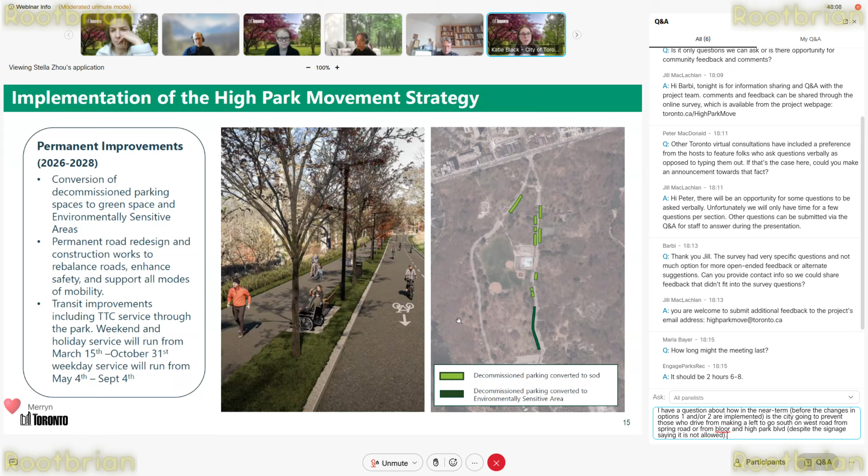Then there will be the report to council. Based on the implementation work and everything that's been done to date, and monitoring of those results, staff will report to council to provide direction on any recommended additional travel network changes and improvements, including the potential for full road closures at all times in High Park.

Next slide. So I'll go now to the project overview, which is specifically the work that we're focusing on today.

Next slide, please. The goals of the road redesign work are to implement the recommendations within the High Park movement strategy regarding specific roadways and pedestrian areas in the park. The overall goal of the movement strategy is to better serve park users and the surrounding community while prioritizing improvements to safety, accessibility, and the park's natural environment. You'll see through the presentation today that we've tried to highlight how the designs are working to achieve those goals, and we welcome feedback on whether or not you think those are working or not.

We've included questions in our online survey too, for folks to respond that way. The scope of the project is focused on Colborne Lodge Drive, West Road, and Centre Road. It will include intersection and road crossing safety improvements, sidewalk expansions, permanent buffered cycle lanes, the construction of a diverted cycle lane around the Grenadier Cafe, and considerations for ecologically sensitive areas, existing trees, and ongoing stewardship initiatives. I see a lot of turtle emojis in the chat, so maybe those are turtle protectors joining us today, but those are definitely being considered as part of this work.

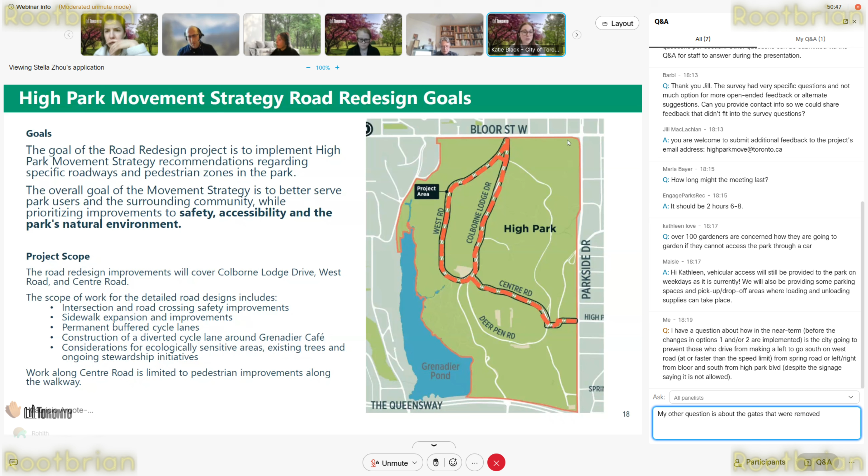In terms of where we're at in the project schedule, I'm sure many folks were involved in our fall initial phase of the work, where we had an online mapping survey for folks to provide their feedback. Our consultants were also gathering background information at that stage, getting up to speed on how the movement strategy has been implemented so far and how it's been working.

Now we are exploring design options, so we've prepared two options for folks to review and get feedback on. We're also getting feedback from a number of other technical partners, such as the TTC, and different city partners or divisions, such as transportation services or natural resource protection, and other groups like that, on those design options.

In the summer, once we've heard all of that feedback, both from the public and our technical partners, we'll use all of that to develop a preferred design. That direction will be communicated in summer 2026. Once we've brought that to the public and heard feedback on that final preferred direction, we will then begin our detailed design and contract documentation, putting it all into construction documents. The aim is to tender the works in spring 2027 for a summer 2027 construction start.

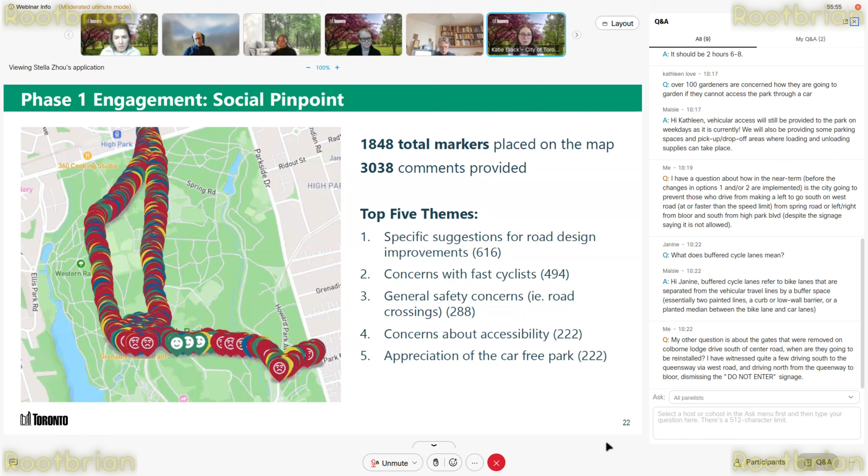So we chose the areas you are seeing in the online survey, and that we'll be talking about today, based on these areas where we've received the most comments, because this is where people have the most input and the most concerns about safety and movement through these spaces. Next slide, please.

Okay Lindsay, can I take it over to you to do the poll? Absolutely. Thank you, Katie. That was great.

So as you've heard from Katie, the scope of this project is very specifically about rebalancing the roads for a variety of users. So we just want another brief opportunity for you to feed in some information to us and for us to know who else is here. How do you like moving through the park? You can pick many, because I think many of us move through the park in many different ways.

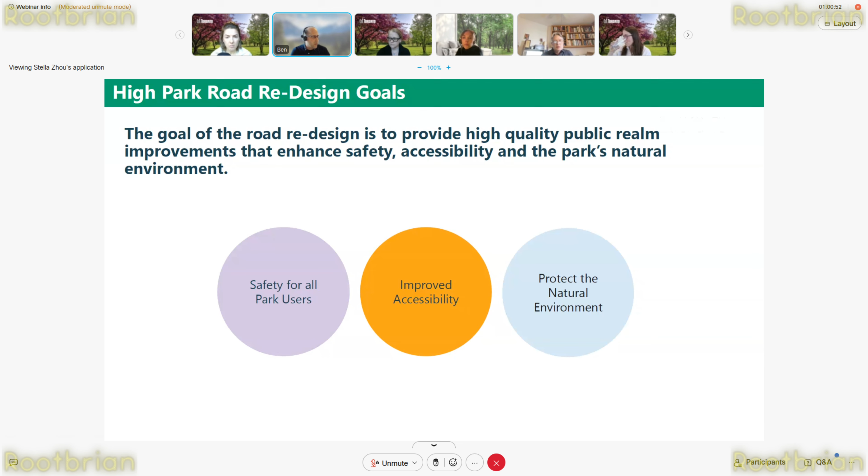Let's move on to the next slide. So we do have the two design options, but here in our approach to enhancing safety, I want to go over how both options enhance safety. There's a number of shared features between the two options. I don't know how many people have taken a closer look through the survey, but some of the common themes are listed here, and I'll go through them and how we think they meet that goal.

One of the key items is crosswalks within the design options are proposed to be raised to give that feeling for pedestrians as they're moving across the road in various locations. Not necessarily the priority, but a location where it's visually clear that they are meant to be crossing, with that clear indication of that crossing level.

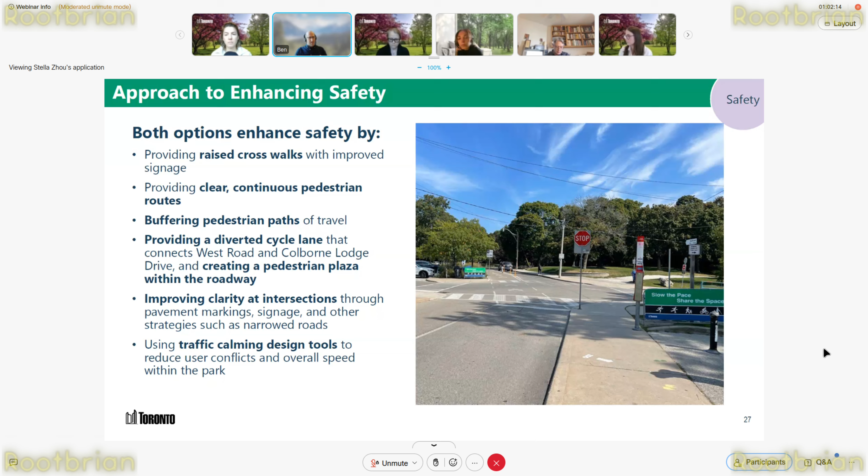Another thing we wanted to do was provide very clear, continuous pedestrian routes within our designs. You'll see in one of the options there's actually a pedestrian loop on the inside of the loop, along the west side of Colborne Lodge Drive and a portion of the east side of West Road. Option 1 does not have that, but option 2 does.

The next item, and I think this is a really important one not only for safety but perceived safety, which is also very important for people feeling comfortable while walking through the park, are those buffered pedestrian paths of travel. In many locations we're narrowing slightly the vehicular lane and the cycling lanes, and in doing so allowing for space for buffers between the pedestrian route and the vehicular route.

The next item: providing that diverted cycle lane that connects West Road and Colborne Lodge Drive. This diverted cycle lane is proposed to go north of the Grenadier Cafe. Instead of having cyclists go south from West Road to the Centre Road intersection, it diverts them north of the Grenadier Cafe, bringing them away from one of the key conflict zones we've heard about from the public, from staff, anecdotally, plus data supporting that these are conflict areas. This allows the pedestrian plaza area south of Grenadier Cafe to be that much safer, with fewer potential conflicts.

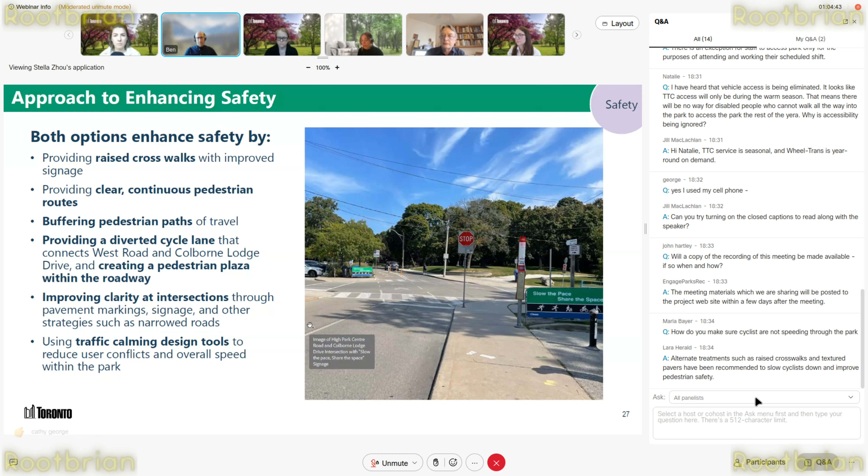Now, with our approach to enhancing accessibility within the park, Katie touched on one. Along Centre Road, we are planning on increasing the number of rest areas and doing some improvements along the walkway there. That's kind of the extent of what's happening along Centre Road.

Throughout the park, we want to meet and exceed the Toronto Accessibility Design Guideline and AODA minimums, one of those being the minimum 2.1 meter wide pedestrian paths. In many locations, we're going wider than that, creating a very comfortable pedestrian and mobility device experience for others who use sidewalks.

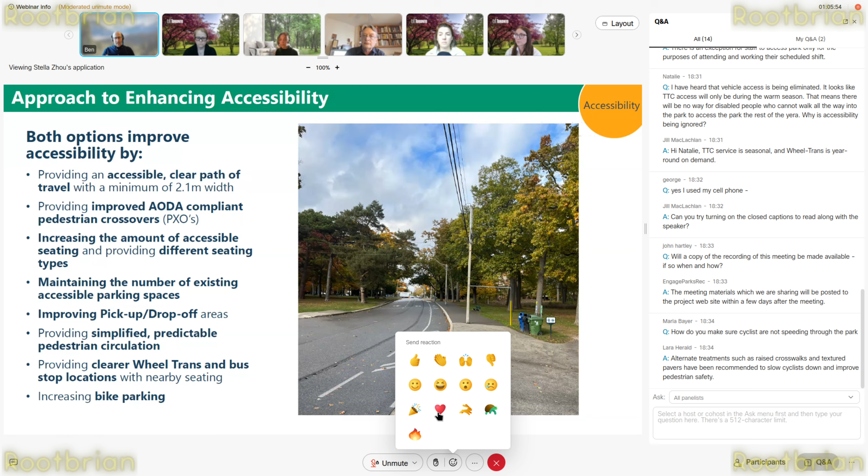In addition to this, improving the pedestrian crossovers—I might call them PXOs from time to time during the presentations, just so you know. This is pedestrian crossings of the road, making sure they're AODA compliant, and looking at ways to make that crossing of the roads more comfortable for people.

The next item we're looking at is increasing the amount of accessible seating. The AODA and Toronto Accessibility Design Guidelines have a goal of seating every 30 meters. This is a guideline, so it's not necessarily something that 100% needs to be met, but we're looking to meet the goals of those guidelines as well.

In designing for parking along the Colborne Lodge Drive, we're maintaining the number of existing accessible parking spaces based on what is there currently after the 2023 High Park Movement Strategy changes took place. Improvements to the pickup drop-off areas are on our list. We're also looking to provide simplified, predictable pedestrian circulation, which is very important from an accessibility standpoint, providing clear Wheel-Trans and bus stop locations, and increasing bike parking as well.

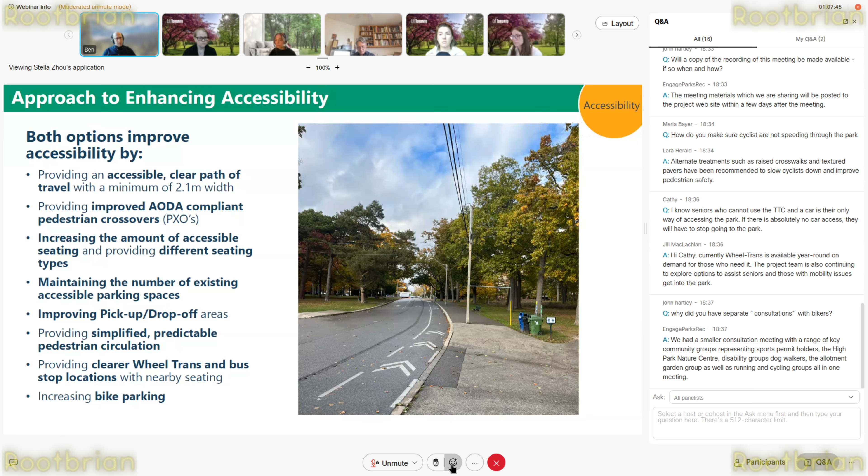Again, looking to not just meet the minimum guidelines, but exceed them in as many ways as we can. We've got team members who are accessibility specialists looking through their experience at how we can make sure this design improves the user experience for folks with accessibility needs—not just physical, but also from a neurodivergent standpoint as well. You can go to the next slide.

Our approach to enhancing the natural environment focuses on improvements within the existing paved areas. For the most part, I'd say 99% of the locations, we are staying within the existing limit of paving. There's some very minor exceptions to that.

The last thing we want to do here is remove or even injure existing trees. So we're going to work very closely with Toronto Urban Forestry as well as the Ravine and Natural Feature Protection folks. A place like High Park really depends on the trees and the vegetation to be what it is, and the last thing we want to do is impact that negatively, so we're going to work really hard to make sure we don't.

If anything, we're expanding as part of the proposed designs the environmentally sensitive areas very slightly. I wouldn't say it's expanding greatly, but there's a couple key locations where we're actually shrinking the paved area slightly as part of our proposed design.

The TRCA, the Toronto Region Conservation Authority, did a road ecology report, and in doing so came up with a couple of recommendations for how we can improve High Park for animals within the park. A key item they looked at was road mortality of animals—turtles, amphibians—and they made some recommendations. I wouldn't say any of them are earth shattering, but they're important recommendations.

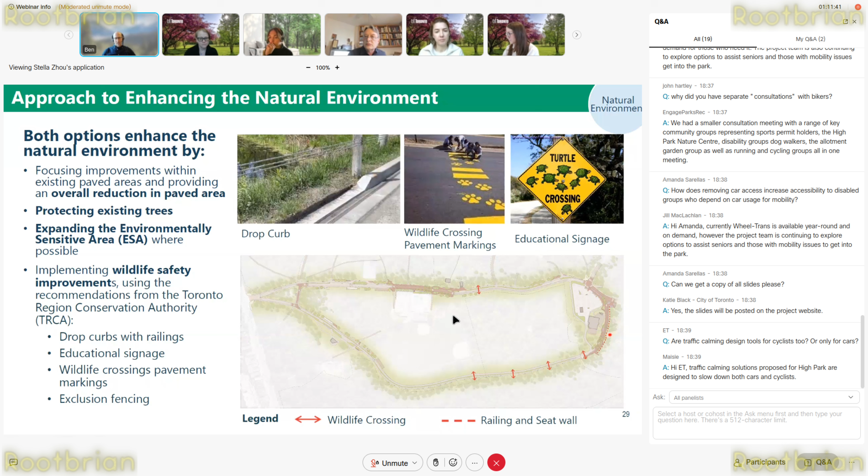Thanks, me again. We talked to people earlier in this phase of engagement, tried to workshop some of these designs. One of the things we realized we needed to make sure people understand clearly is what the goals of this phase of the movement strategy are. So this is what you've just heard from both Katie and Ben. We're gonna launch a poll here, just asking about these 3 goals and trying to get a sense of what people's priorities are.

Stella, are you able to launch that? My apologies, give me a minute to get it out. Are we having technical challenges here? We could. Oh, there we go. I was just going to change things, but here we go.

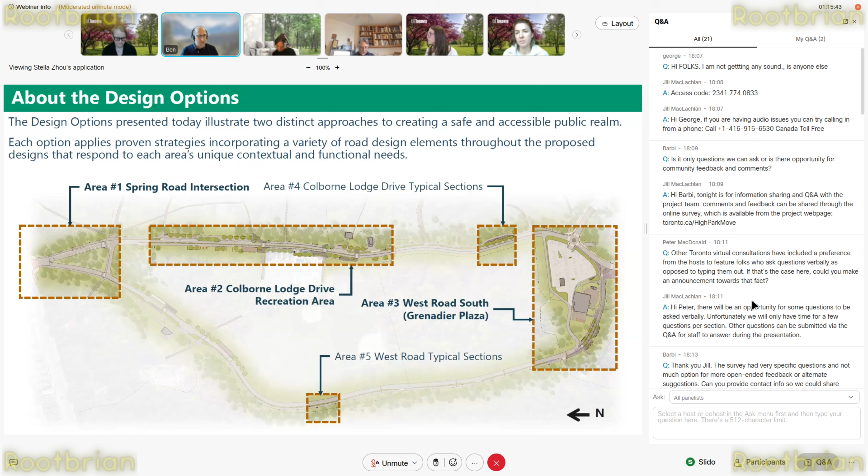As I mentioned before, we've got two different design options. At risk of getting too technical with things, I want to try to walk the line of making it accessible for everyone and giving you the details that you want to see, so that you know that what we're doing for this park is good for the city, is good for users. Like I was saying, two distinct approaches.

So the two options both improve safety and accessibility within the public realm, but they apply different strategies. They apply proven strategies for incorporating a variety of road design elements throughout the proposed designs. They respond to each area's unique contextual and functional needs. There are 5 different areas that we're going to focus on - the first 3 in a little bit more detail, and the fourth and fifth in a little bit less detail, further along in the presentation.

But we thought we would bring these areas to the forefront because they're areas that we want feedback on. Not that we don't want feedback for other areas, but there are areas that we want to focus on so that we can get some distinct feedback.

The first one is the Spring Road intersection. So this is the area that you see on the left of the screen. It's the area from basically where Spring Road intersects with West Road and Colborne Lodge Drive, and where those two roads head north towards Bloor.

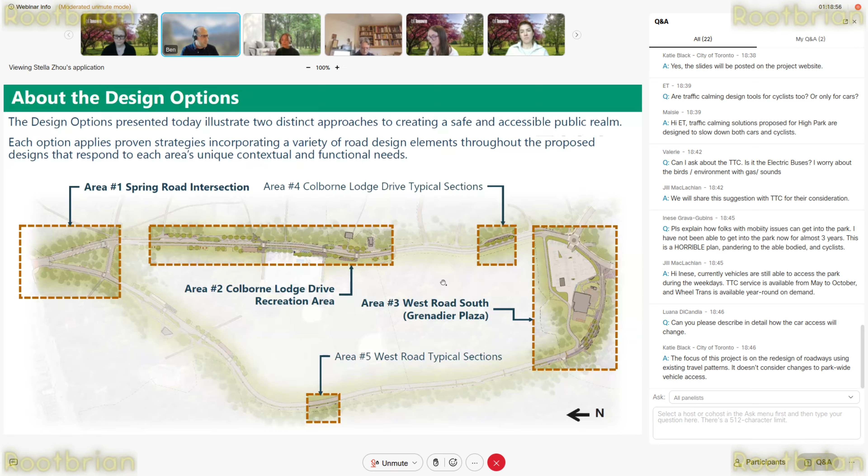So as I mentioned, there are 2 distinct options. When you just look at them from above for a few moments, it might be hard to pull out the differences, so I'm going to try to walk you through how we've approached these.

Option number 1, we're looking at separated modes of travel. So what this means is that instead of everyone being packed together on one route, we want to separate cyclists with physical barriers or pavement markings from vehicular lanes. We're also separating pedestrians and mobility devices from vehicular lanes with something like a planted buffer that you see in the top right - planted buffers being important not just for aesthetics, but also for safety and perceived safety.

Just think about your experience - close your eyes walking along a road whose sidewalk is right against the curb where vehicles are speeding by. Well, you're going to be a lot more comfortable if you're using that walkway and there's say a 1.22 meter planted buffer between that walkway and the vehicles. Not that vehicles are speeding necessarily in High Park, but nonetheless it's more comfortable.

Again, the raised crosswalks - this gives a visual cue that this is a location for pedestrians to cross. The other item we've looked at in option one is what's called a type C PXO - pedestrian crossing with a push button and flashing lights, sometimes with a solar powered element, sometimes hardwired. Based on some research we've reviewed, these type C PXOs often have a higher compliance rate when it comes to vehicles approaching them, and also when it comes to pedestrians using them.

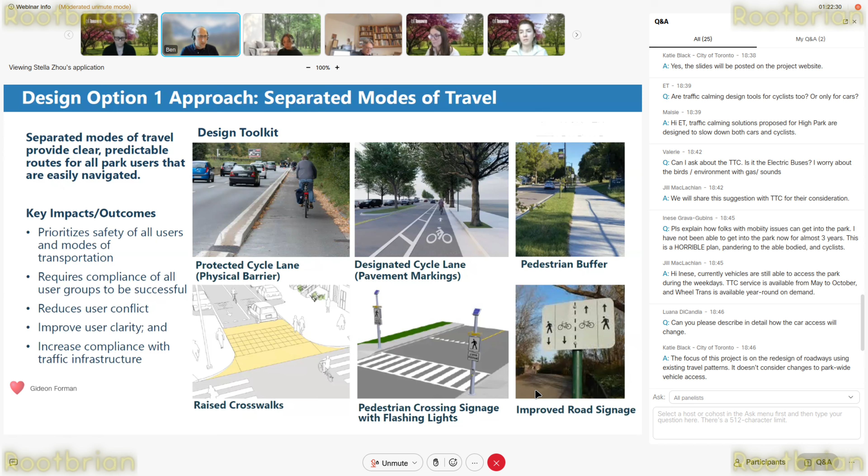We can go on to design option number two. The approach for design option number two - and I didn't mention this for option number one either - really follows the High Park movement strategy. I don't know if ethos is the wrong word, but it really follows quite closely the goals and the design shown in the High Park movement strategy.

It just formalizes it. What we've done as part of design option number two, we haven't strayed from the High Park movement strategy, but we've kind of reimagined how some of the spaces can be used. We've looked at shared spaces based on some examples we know of in Ontario, based on the City of Toronto Complete Streets guidelines, and based on some international examples that the team knows of and that other folks from our design community have worked on in other places.

What design option number two does is focus on shared spaces to create barrier-free environments. It naturally slows movement and enhances safety through visual cues - and you can see some of those cues in the top right and top left photo, where there's different pavement surfacing and different pavement colors.

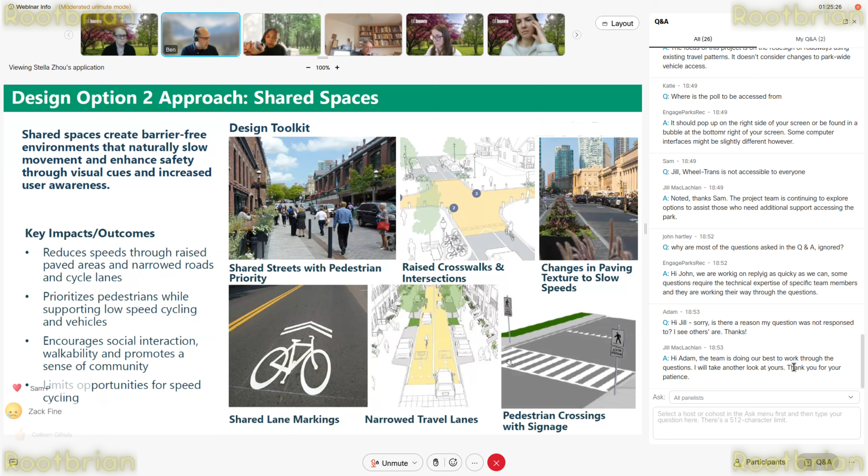On to the next slide. I'll go through the Spring Road intersection now. Again, you can see on the key map this is the location where Spring Road, West Road, and Colborne Lodge Drive come together in a bit of a triangle, and then head north towards Bloor.

There's a number of safety, accessibility, and environmental concerns here that we've heard from the public, seen as part of the public life study, and noticed through our walkthroughs of the park - the number of crossings in this location, and the low compliance with crossing infrastructure.

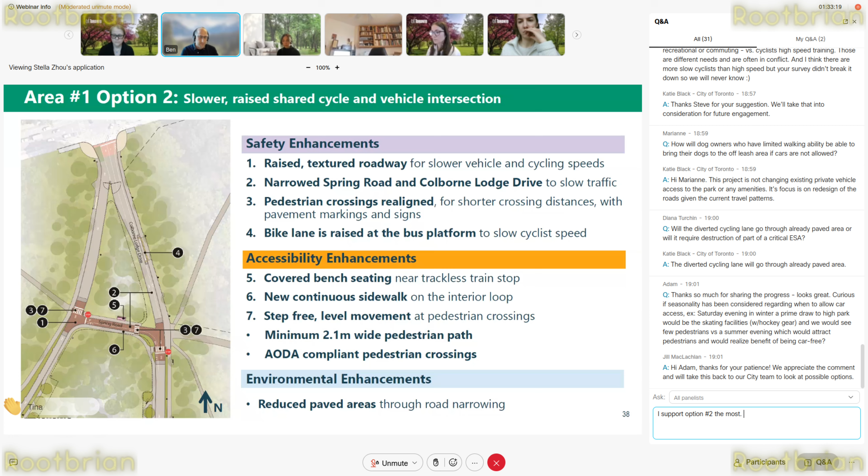And then again, the bike lane raised at the bus platform, and from an accessibility standpoint, covered bench seating. In this option, there's a continuous sidewalk on the interior loop, and we've done that for the most part without increasing the paved space, by narrowing the roadway. And then step-free level movement at pedestrian crossings, minimum 2.1 meter wide pedestrian paths, AODA compliant pedestrian crossings, and a reduced paved area. We move on to the next one, and I'll have a good drink of water and a cough here.

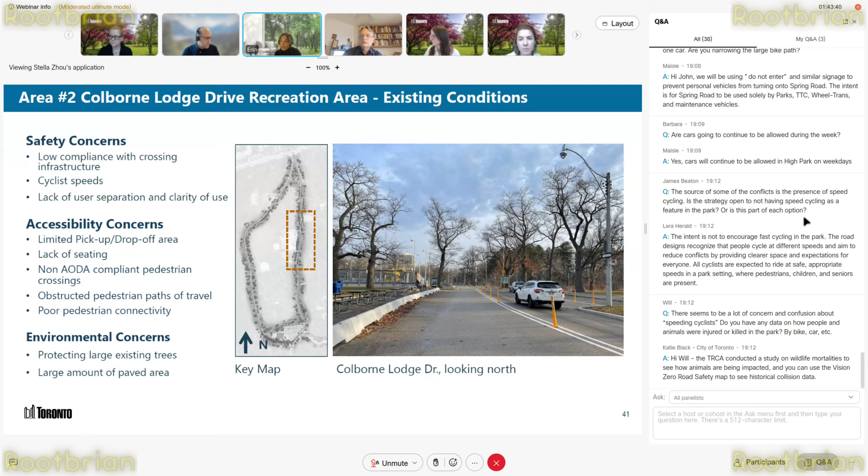So option 1 in this area, this is the theme for this option. It focuses on separating spaces to provide clarity between the users.

So for pedestrians, you have barrier-free access across the road. And that will include the signage Ben discussed previously in our design toolkit, which will include signage and push button lights to alert vehicles and cyclists of pedestrians crossing at that time.

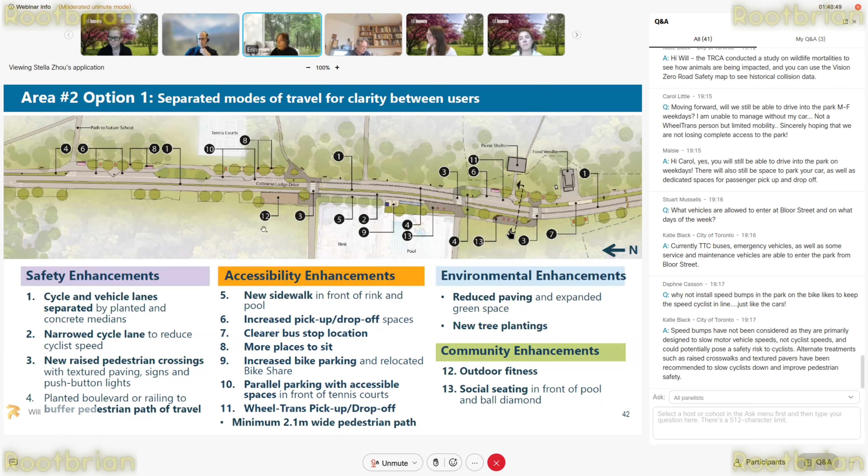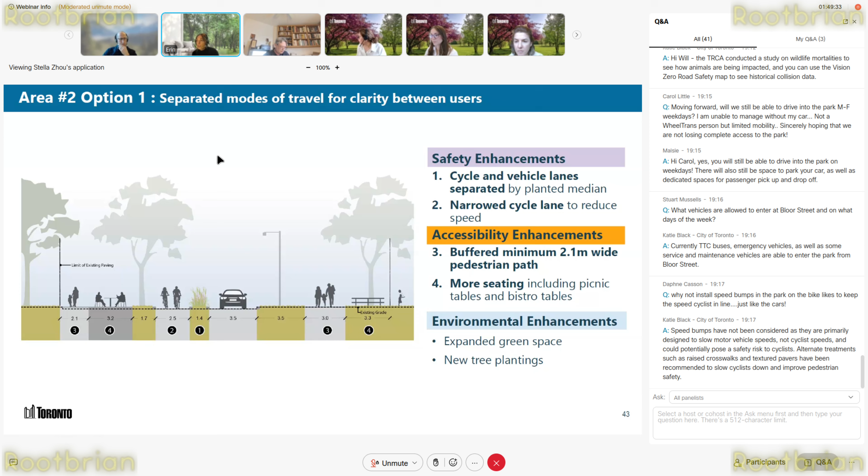This also shows a bit better than the plan, the buffered widened pedestrian paths, which include a new sidewalk on the left-hand side, so you have 2 options for pedestrians to circulate the park. You can also see how these seating nodes, identified by number 4, interact with the rest of the park - the picnic tables opening up into the park area, and the bistro seating in the paved area, adjacent to the walkway.

You can go to the next slide.

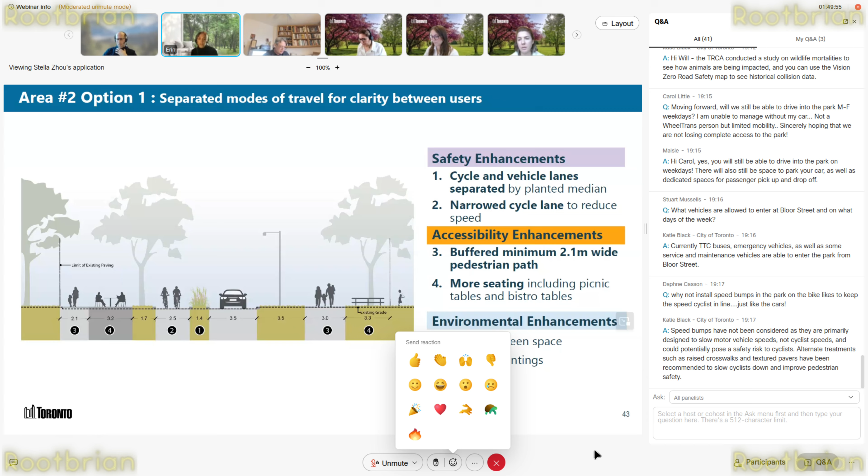The first component is the change of the color and the texture of the shared space, which alerts all users to slow down and pay attention as something's changed in their environment. This is a high conflict zone where pedestrians are crossing, so that's why it was chosen as one of the shared space areas in option 2.

The second component is the shared travel lane. In this area, moving from right to left, the cycle and vehicle lanes converge into a shared travel lane, which also encourages slower speeds as vehicles and cyclists try to navigate this space together as they move through and come together from a separated lane.

The third component is the designated crossings that still exist. It's still important in a shared street to encourage predictable pedestrian movement and provide that safe space for everyone to cross.

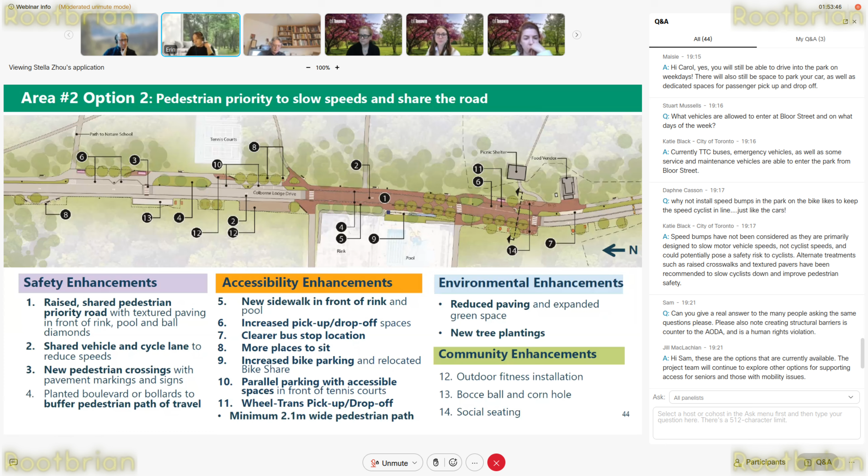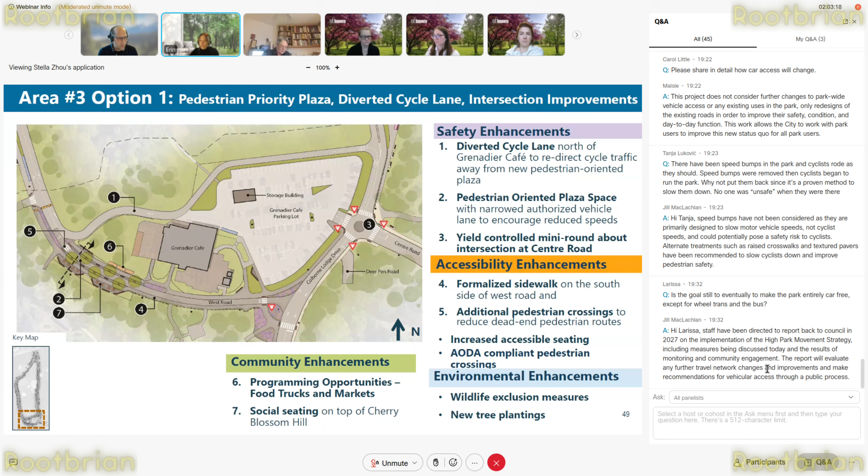This is focusing on option 1, the Centre Road intersection. This responds to the safety concerns by proposing a yield-controlled intersection with a mini roundabout, and some of the key outcomes are lower vehicle speeds.

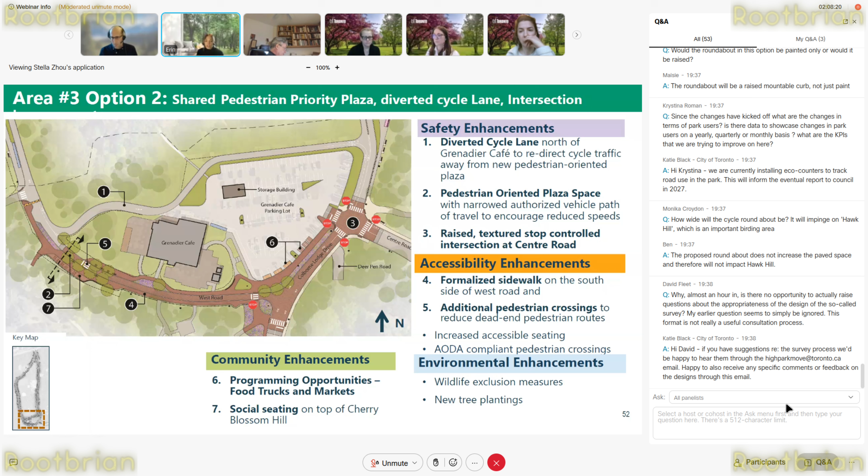In this option, because the shared street extends beyond into Colborne Lodge Drive, this allows the potential for the food trucks, artisans, or markets to be moved to a section of the existing Grenadier parking lot. Pedestrians can still access those programs, but then use the pedestrian plaza as it's intended—to sit, relax, gather, and maybe enjoy things they've purchased at the cafe or food trucks.

This is a section again through the pedestrian plaza for option 2, showing the components of the shared street and how they come together in this option. You can see the same elements: room for authorized vehicles, planting and furnishing zones that separate the pedestrian path of travel from the vehicle path of travel, and the seating nodes as well, showing some bistro seating.

In this option, identified with number 6, is the railing option of the wildlife exclusion fencing. This would operate the same way, but is used where there's a space constraint and a seat wall can't be placed.

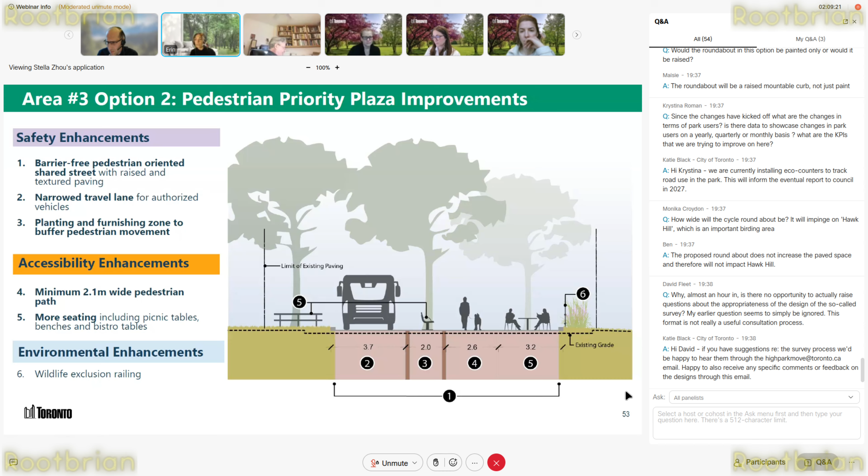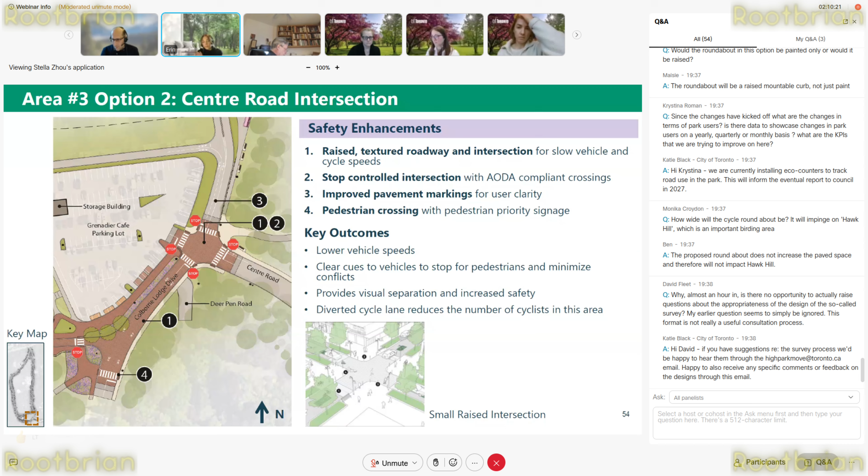Yes, we have time for at least one question, hopefully two. Denise, I see your hand up, but we did hear from you, so I'm going to the next person in the interest of hearing from a range of people. George, I have you next—do you have a question? Oh, George Frater, you don't want to unmute? Oh, I am unmuted now, right? Okay, hold on. Yep, we can hear you.

Okay, good. This last session was mainly about that Grenadier restaurant. I'm a user of it. I love going to High Park, but I don't live that near. So this idea of putting in caterers and vans and selling hot dogs, what is that about? But I also qualify who I am—I'm 68, I can ride a bike, I've got 3 bikes in the garage. I lived in Holland for 20 months, had 2 bikes there, one speed to go to work. Now the bike fanatics are going to lose their velodrome. Maybe the city can build one somewhere in a parking lot or build a new parking lot. I'm very concerned about using the restaurant, especially on a cold, lousy, rainy day. I'm not taking transit and I'm not going to ride my bike. I want to drive. So I'm worried about this closure that is unpredictable, maybe right now.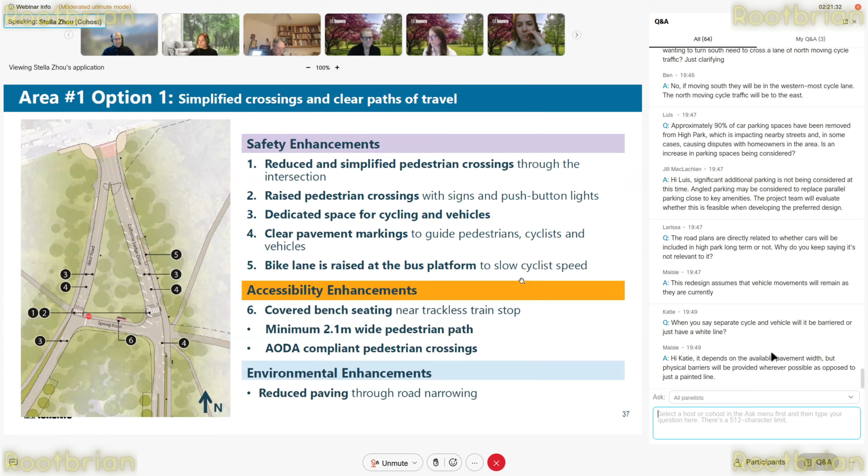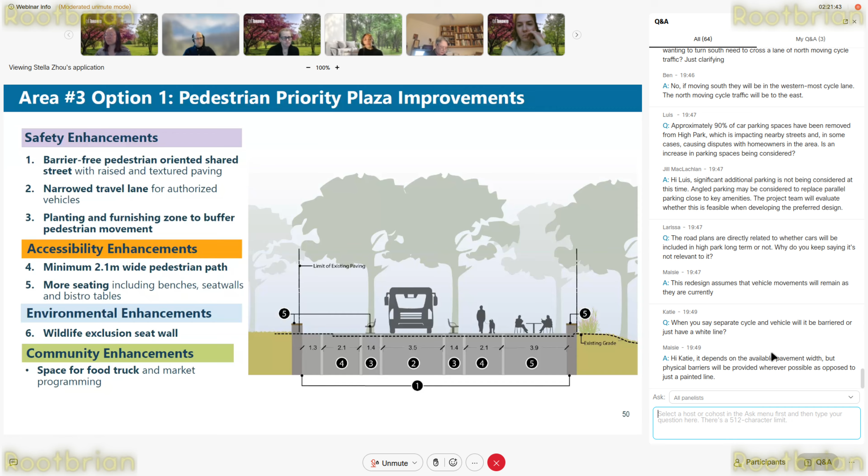Oh boy, a bit of technical difficulties, I gotta jump back to that one slide again. West Road. Sorry Stella, putting you on the spot here. Yeah, oh there we go, yeah there we are. Oh sorry, you know what, we don't have the cross section as part of this, it's in the appendix actually, I apologize.